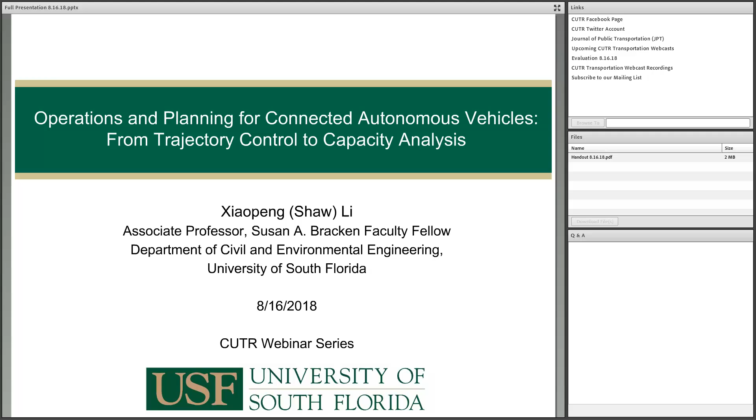So next slide, and if you may, please play the video.

I just want to start with some real-world observations, and this is a stop-go phenomenon that probably everyone experiences in their morning or afternoon commute on freeways. When traffic is slightly congested, vehicles are engaged in repeated acceleration, deceleration, or even stop and go, which is pretty bothering to all of us. Turning this off. The next slide.

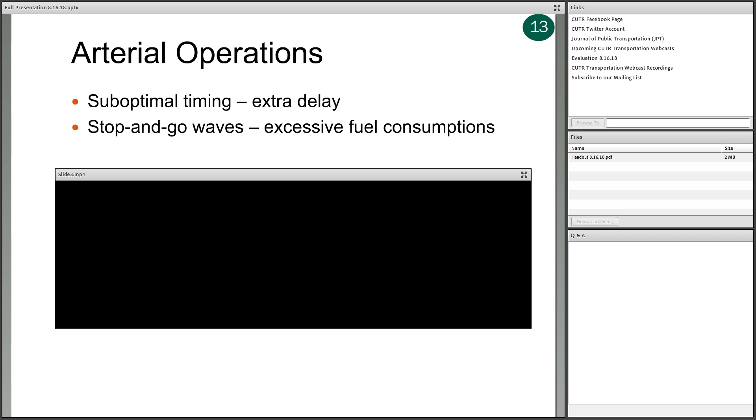Okay. All right. And then you may wonder what happens to arterials with signalized intersections. Let's see whether the video goes. Okay, here.

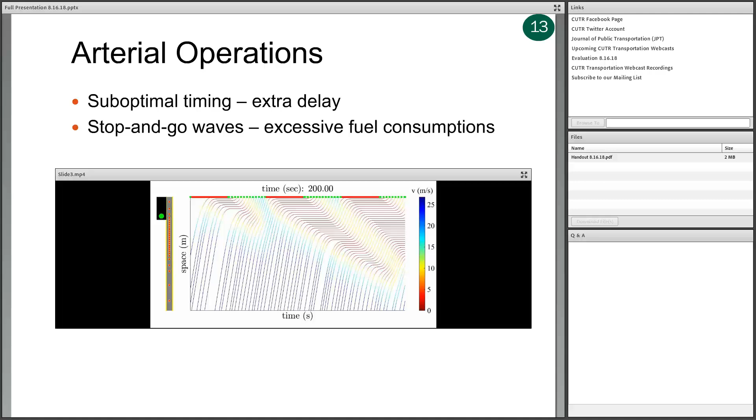So this is a simulation about how vehicles move in front of a traffic signal light. You can see due to the alternating red and green lights along the timeline, vehicles have to stop and go, which forms this kind of stop and go waves in front of the signalized intersection. So this is also an adversary to our driving experience. So next slide.

Whether on freeway or arterial, this kind of annoying phenomena in human-driven traffic, which is what we have now, have lots of adverse impacts, such as congestion. You know that congestion is pretty severe in every major city and costs a lot of money. And next, due to the excessive travel time and increased stop and go movements, fuel consumption and emissions are significantly increased, not only in the U.S. but also across the world. And following this, the safety hazards are much more exacerbated. We know if vehicles are frequently decelerating and accelerating, the safety risks are going to soar.

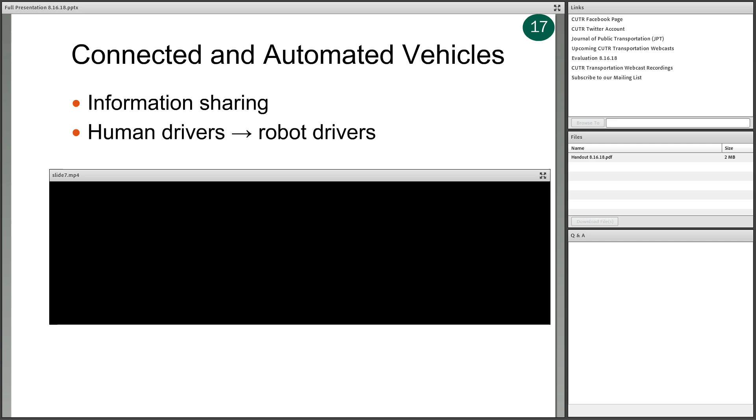So how to address these problems, actually? I mean, there are many ways, and this is probably the central problem that transportation engineers should focus on. And my approach is to think of emerging technologies such as connected and autonomous vehicles. Basically, connected vehicle technology is just information sharing. So vehicles can talk to neighbor vehicles and infrastructure units, so they know each other's information.

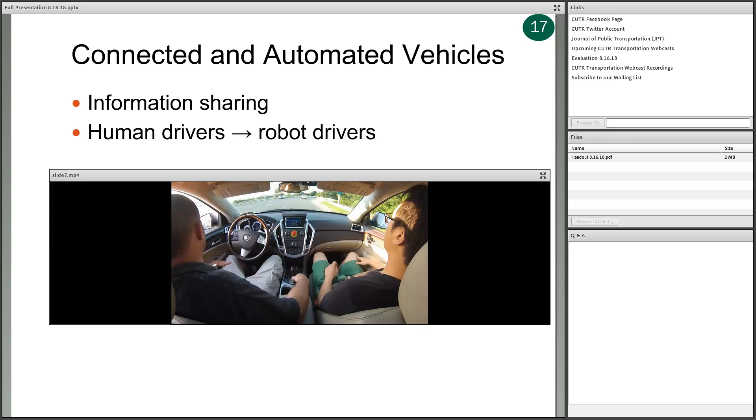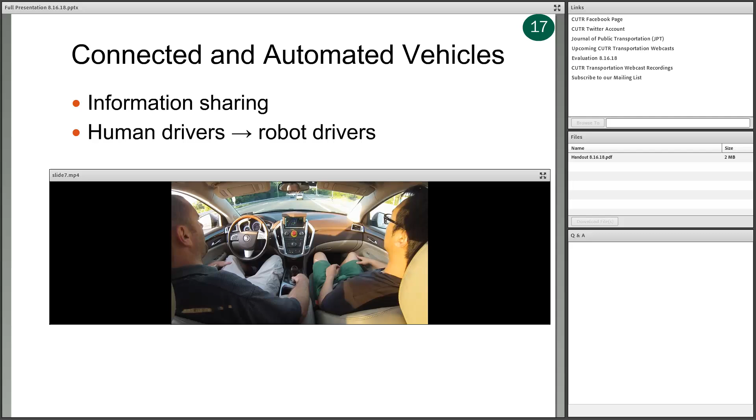That's a connected vehicle. And automated vehicles, or sometimes autonomous vehicles, basically replace human drivers with robot drivers. And just like this video shows, humans can all be turned into passengers, and the computers will take the chauffeur's job. Next slide.

So why do I resort to CAV technologies for the final cure? Because with CAV technology, we can actually control each vehicle's movement exactly and precisely. And then we can coordinate their movements in ways that we could not do with human-driven vehicles. And some fundamentals of highway traffic operations may be revolutionized due to these new technologies.

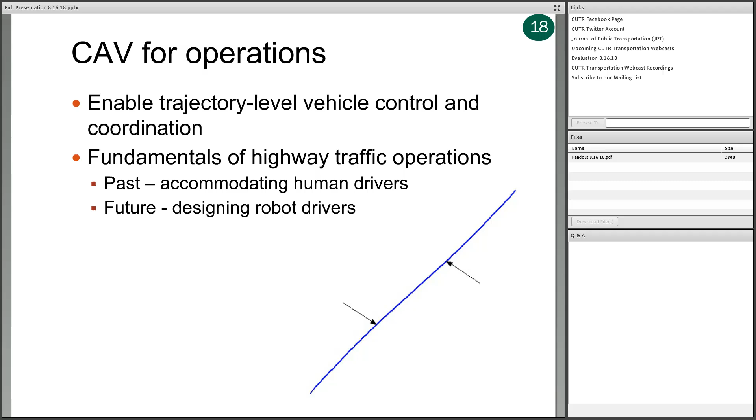In the past, we designed all these management schemes and planned the infrastructure just to accommodate human drivers and their behaviors. But in the future, it's all about designing the protocols and programs of robot drivers. So this nice transition gives us lots of opportunities to address and resolve some of the outstanding transportation issues I mentioned earlier. So let's talk about a couple of points about the implications of this technology for planning and operations.

So actually, how to realize it? I cannot do a poll, but I am pretty curious about your view on how much capacity CAVs can improve. Lots of uncertainties. But this is definitely something we want to work on, and I hope sometime we can achieve like 5,000 or 6,000 vehicles capacity per lane.

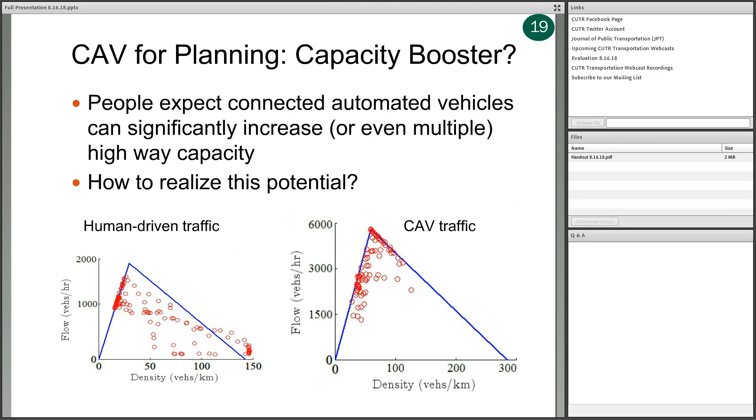And then, so we talked about the operations issues and planning issues about the CAV before. So how do we really use the CAV technologies to realize these nice visions from the engineering point of view? So I take a three-step approach.

First, I really want to look into each individual vehicle's movements and microscopic behavior, and we want to look into how to control each individual vehicle's trajectories in order to improve traffic smoothness and reduce headway. And this microscopic level of benefit will turn into macroscopic capacity improvement, and we want to understand the relationships between CAV traffic characteristics such as CAV penetration ratio and other things, and the macroscopic measures such as traffic throughput that are concerned in transportation planning.

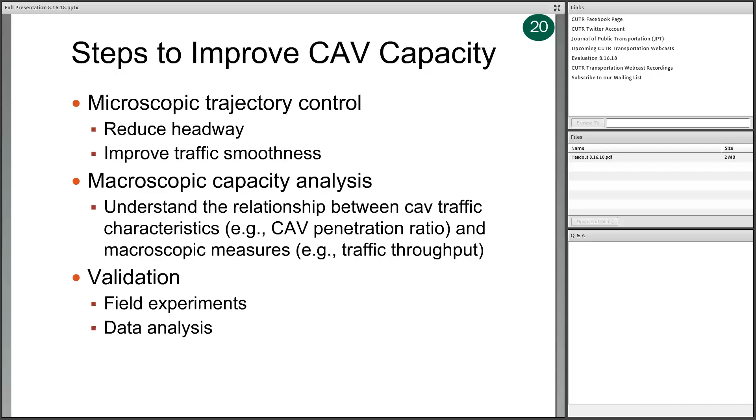And with both of them being investigated, we really want to validate and test some of these hypotheses and conjectures with field experiments and data analysis. So today I'm going to go through some of my research along this line. So let's just look at the CAV-based traffic operations, mainly on the trajectory level control issues.

I think one major benefit of CAVs is actually we can control the vehicle trajectories, design the vehicle trajectories, and break the traditional box of car following behavior or traditional driving behavior, and really design a new regime of vehicle trajectories. So for example, in the signalized intersection example, the left figure shows the traditional human-driven vehicle trajectories over a segment leading to a signal light over time. We show the trajectories, and we've already experienced stop and go waves due to the stops at the signal light.

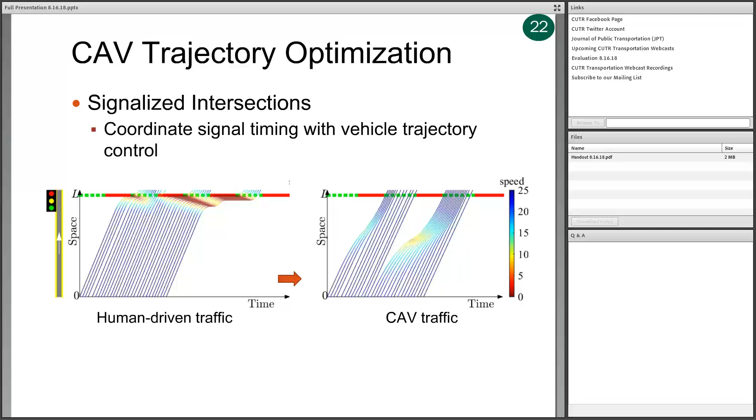But actually with CAV technologies, we may be able to really smooth all these trajectories, let the vehicles gently slow down during the course of running on this segment rather than being stopped right in front of the intersection. This is going to bring lots of benefit, like improving throughput because of reduced lost time and smoother ways of passing the intersection. And of course, these trajectories are smoother, which means that the fuel consumption is less and the safety hazards will be much mitigated.

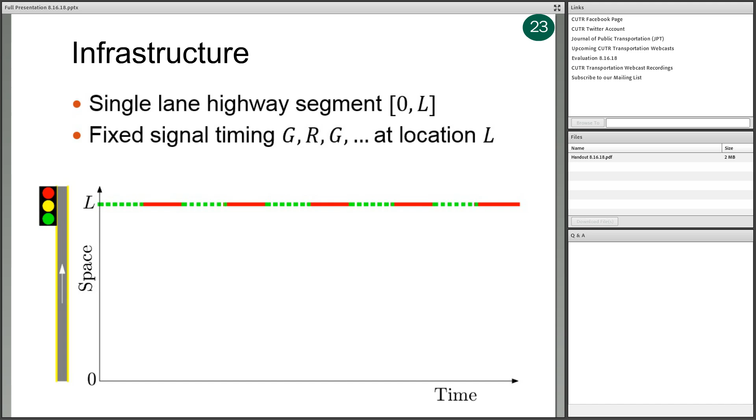Actually, I just want to give you a little bit of flavor about our technical work in this area, just to give you some hints about how we can approach this kind of problem. How do we really implement that kind of smooth trajectory? So basically, we started from a simple problem with a single-lane highway, and we consider fixed signal timing with green time being G, red time being R, and with advanced information technologies, we know when each vehicle arrives at which speed along this segment for some prediction horizon, like a couple of minutes or so.

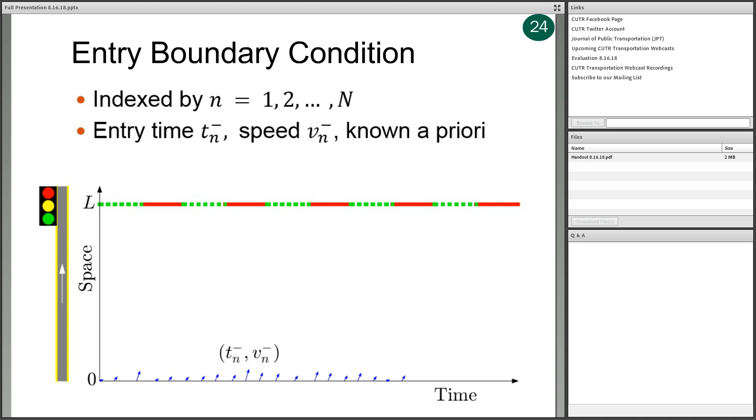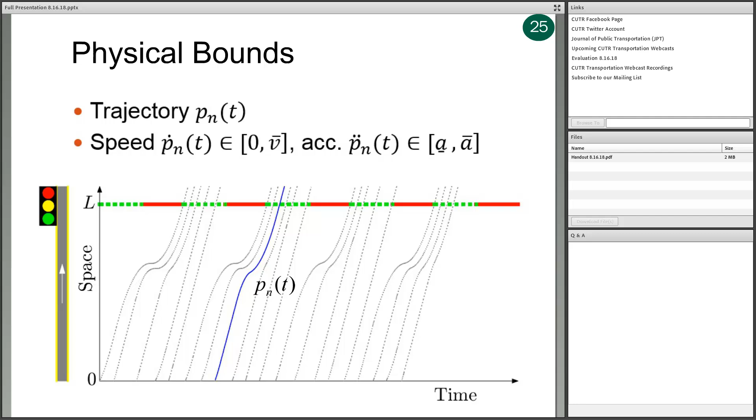And then we know some physical bounds of the trajectories. Let's say there is some speed limit, and accelerations should be limited within a certain range. And we only allow these vehicles to exit this segment at the green time, right? Of course, red time prohibits vehicles from passing.

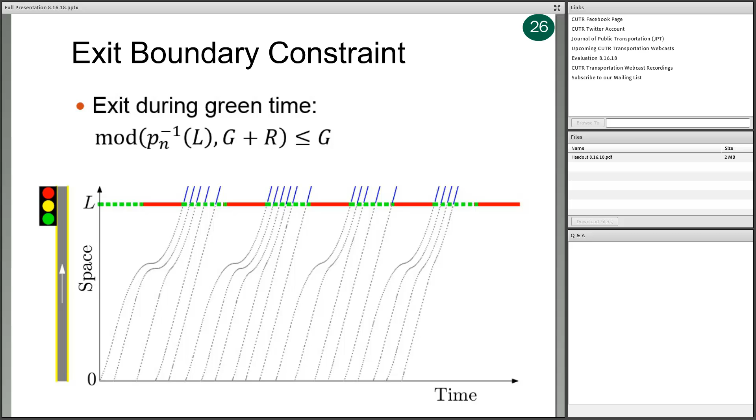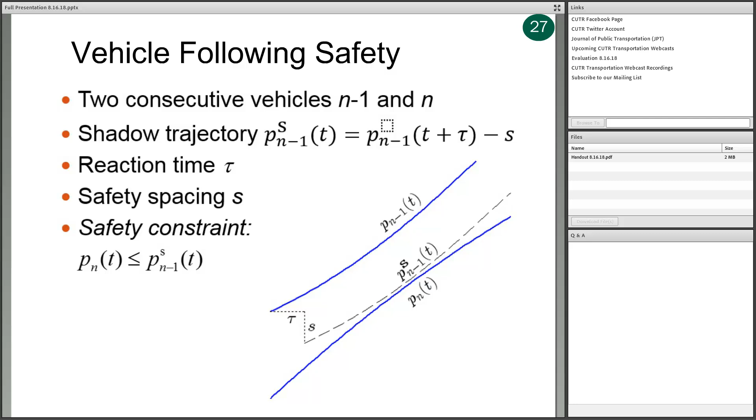And then next, we have to pay attention to the safety between every two consecutive vehicles. So we just say each vehicle is separated from the preceding vehicle by a certain time separation, like reaction time, and a spacing separation, as shown here. That means the vehicle's length plus a safety buffer. So basically, we want to separate all these trajectories within a certain safe and comfortable buffer.

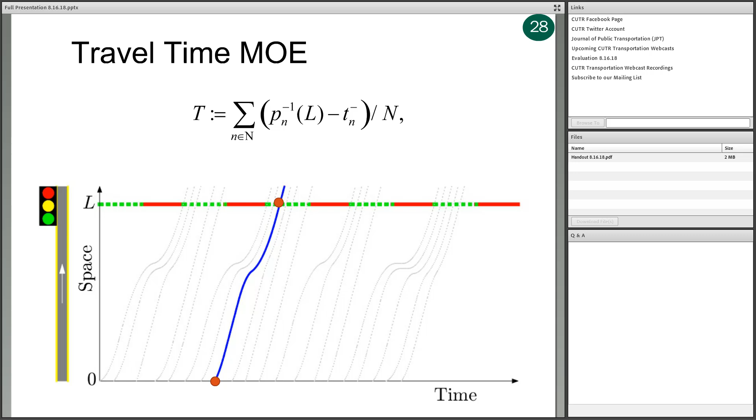With these constraints and settings, what are the objectives for the trajectory control? First, we want to reduce the travel time, right? The travel time for trajectories is very easy to calculate. You look at the difference between these two time points: the time point when this vehicle arrives at this segment, and the time point on the top, departing from this intersection.

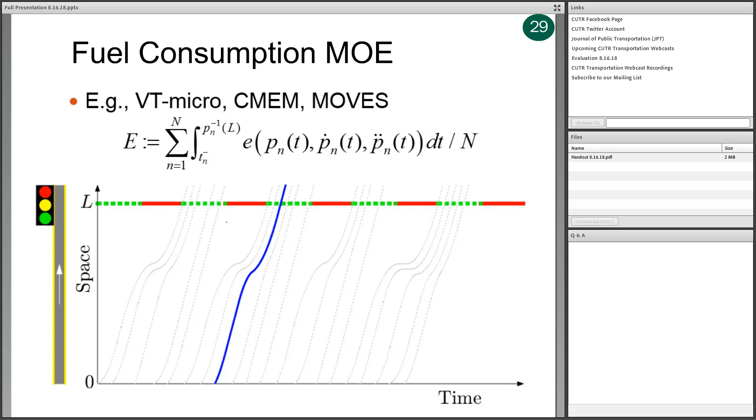And next, we want to minimize the fuel consumption. The fuel consumption can be calculated based on trajectory shape. There are many ways of doing this, but the basic idea is the smoother the trajectories are, the lower the fuel consumption is. And we also can use some surrogate measures to describe the safety, for example, something related to time to collision.

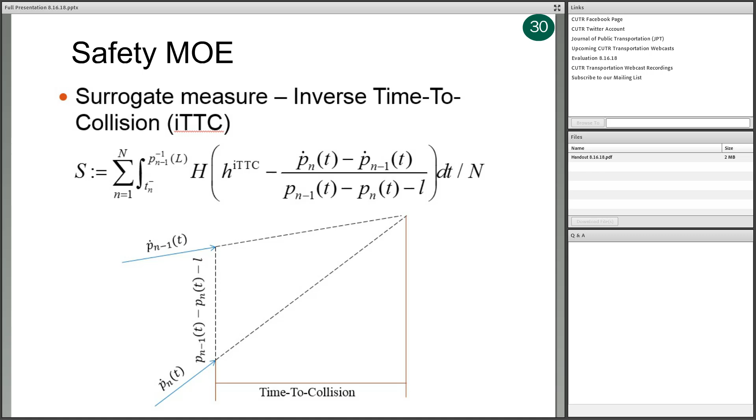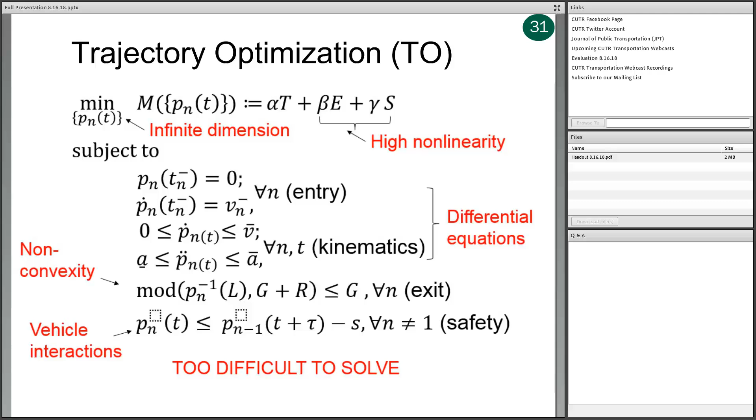So with these objectives and the problem settings, we can basically formulate this problem into a kind of trajectory optimization. Don't worry, I don't intend to go into the depths of the math, but I just want to show the complexity of this problem. Originally, the decision variables have infinite dimensions, and objectives, including travel delay, fuel consumption, and safety, have high nonlinearity, and you have differential equations, non-convexity, and vehicle interactions. So basically, I just want to throw out these terms to let you know this problem is really difficult.

But our contribution is actually to develop a really simple algorithm and approach to solve this problem. So basically, the idea is, if you look at this map, we're going to break the vehicle trajectories into a few analytical segments, and we don't need to control every point of it, but we control some critical points, and that's going to determine the overall shape of those trajectories, and that's going to much simplify this problem.

And with this, we will be able to obtain a solution really fast, and that's going to satisfy the real-time applications, because lots of these trajectory controls have to be implemented in near real time. So we cannot afford to deal with such complex problems. So our innovations are in largely reducing the complexity, and still the resulting trajectories are near optimal, very good quality. It can be solved very fast.

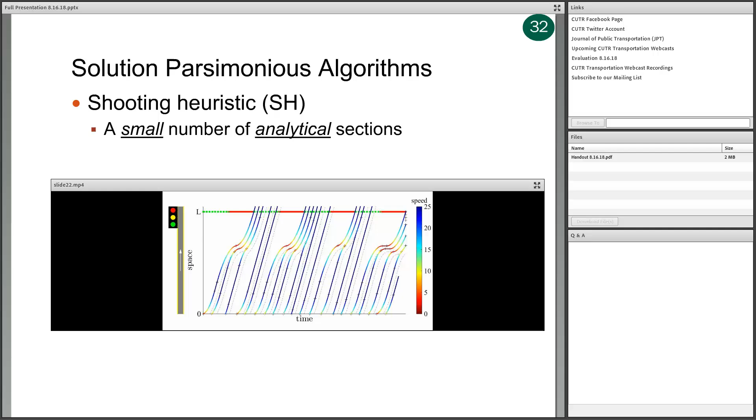Next, the first work just investigated pure CAV operations. That was probably the most ideal scenario where every vehicle is controllable and we don't need to worry about human behavior. But it was necessary to investigate pure CAV traffic because we want to know, at the best, how much we can do, right? At the most optimistic scenario, how much we can do. That's going to be the future benchmark. But we have to pay attention to the transition from pure human-driven vehicles to pure CAVs. That is mixed traffic, right?

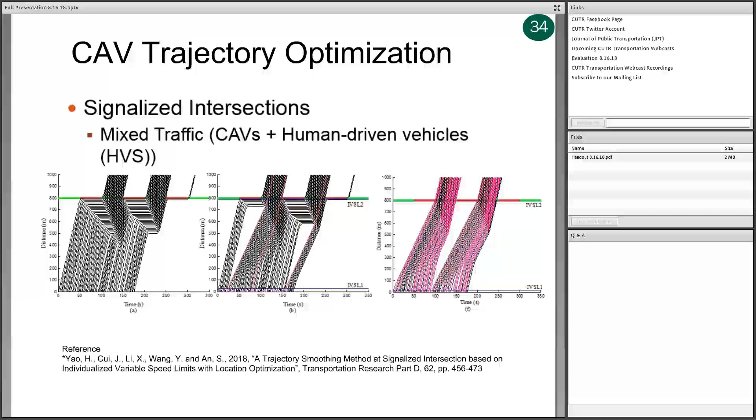And of course, on the right figure, as the penetration rate increases, the benefit will be even higher. But it's exciting to see that we don't need a very high percentage of CAVs to achieve good benefits from smoothing.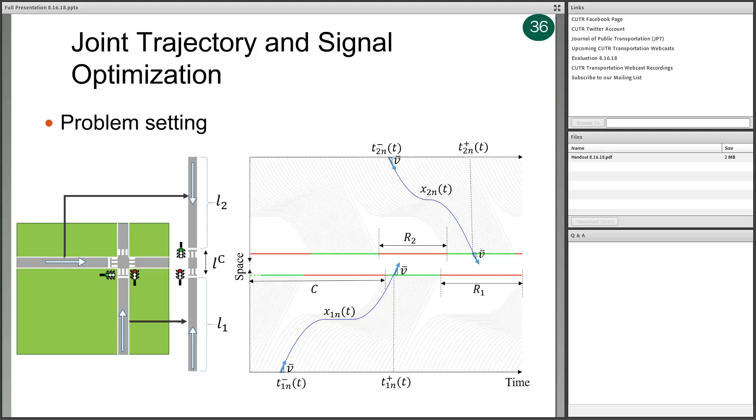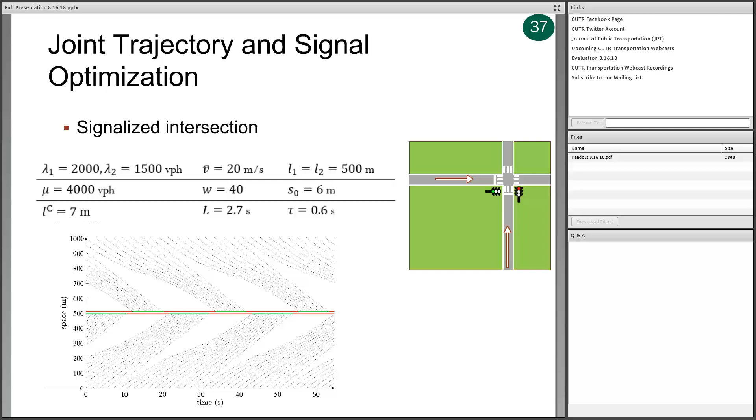We applied this to some numerical studies, and we found that significant improvements can be made at the signalized intersection. We can also adapt this idea to the control of a work zone. Basically the work zone is just like an elongated signalized intersection with a longer clearance time, and we can still use the same principle to do the trajectory optimization.

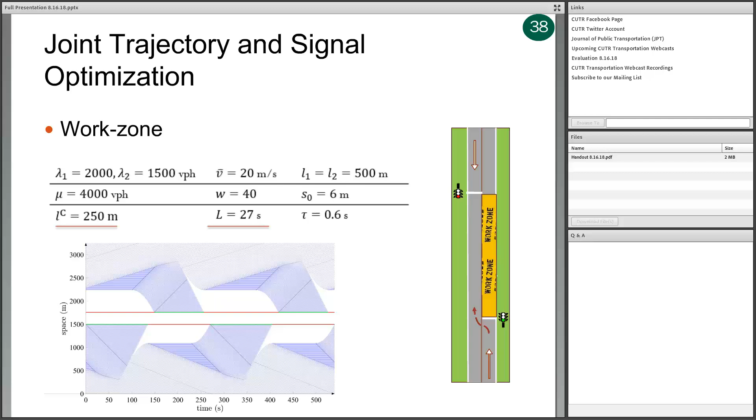And recently, previous studies used some prescribed formulas to design vehicle trajectories, and one place where we can improve is their adaptivity and flexibility to the human-driven vehicles around the CAVs. We are particularly interested in mixed traffic, so we recently did some work using deep neural networks and learning techniques to design vehicle trajectories.

The advantage of this learning technique is that it can take in real-time information very effectively and make the autonomous vehicle control adaptive to real-time traffic states. We don't need to constrain a vehicle trajectory to a certain formula or shape, and the learning will give you the best shape. So this is something in our work. This gives you a brief introduction to my line of research on trajectory control and how to use this concept to improve traffic operations.

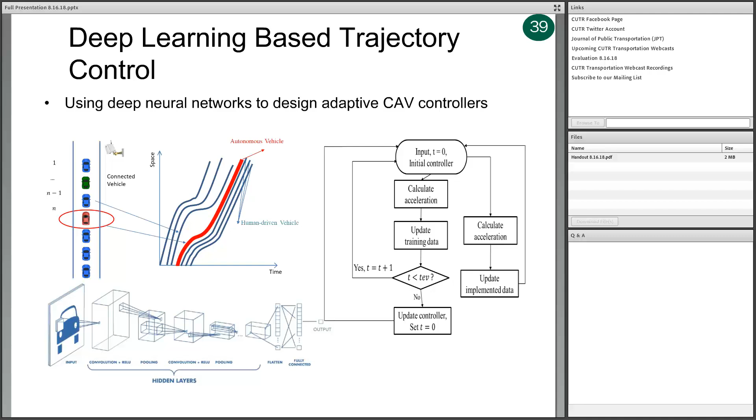Next, I want to go from the microscopic perspective to the macroscopic issues. We've seen a bunch of trajectory optimizations, so what is the implication of trajectory optimization if you look at the problem from a 10,000-foot view? Essentially these trajectory controls determine the headways between CAVs and between a CAV and a human-driven vehicle. So the headway is probably the most important factor that links microscopic trajectory operations and macroscopic capacity analysis.

The most critical issue in capacity analysis is mixed traffic, because that's the problem we want to address in the near future when CAV fleets arrive. So what are the fundamental differences between CAV traffic and human-driven traffic from the perspective of capacity? One outstanding difference is that for CAV traffic, you have to consider heterogeneous headways in the mixed traffic.

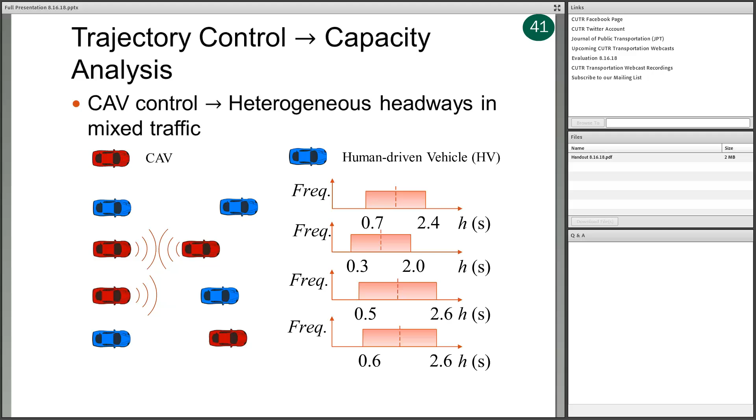Lots of studies just optimistically assume that CAV following CAV has a minimum headway. But I wonder whether this is always the case. Are we a little bit too optimistic? Let's look at what actually happened. This is probably a piece of news you might have seen before: a Google car was pulled over for being too slow and driving too conservatively. That means it was probably keeping too long a headway from the preceding vehicle. And also, if you test ACC vehicles, if you activate adaptive cruise control.

If your vehicle has adaptive cruise control and you're using it on the freeway, you're going to see lots of times your headway from the preceding vehicle is a lot longer than other vehicles' headways. Other vehicles are human-driven vehicles. Actually, if you look at freeway traffic, some human-driven vehicles are pretty aggressive. They can follow the preceding vehicle with less than 1 second headway, right?

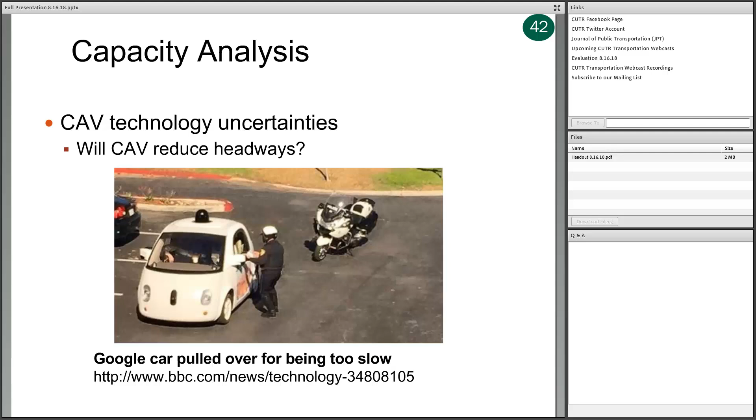So this is not always the case, I guess, that the CAV is always better than HVs in terms of headways. At least in the near future, when these technologies are just put into market, we have to pay attention to this issue. So in some, let's say, pessimistic technology scenarios, we may see CAV pairs may keep even longer headways compared with HV following HV.

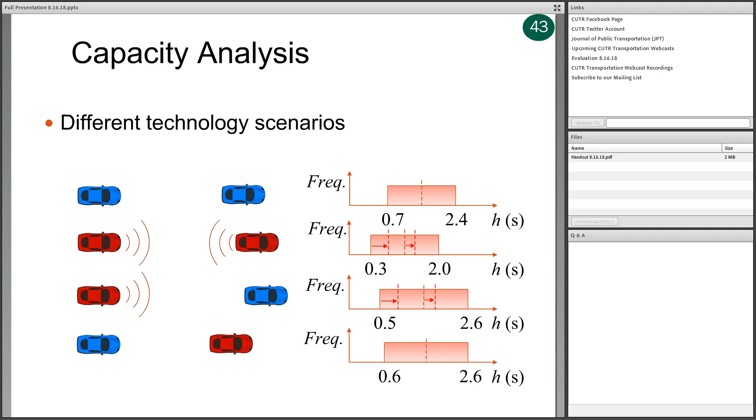So in this study, we have to consider the different technology scenarios and really fully realize the uncertainties of the technologies when we analyze the capacities and talk about planning issues like 10 years or 20 years ahead.

So besides the heterogeneous headways, another important issue is the spatial distributions of these different vehicle types. There are 2 factors that largely determine the spatial distribution of these vehicles. First is the market penetration rate. You all know market penetration rate, right? That's the percentage of CAVs over the total number of vehicles. If the technology is optimistic, of course, higher CAV market penetration rates will improve the traffic capacity,

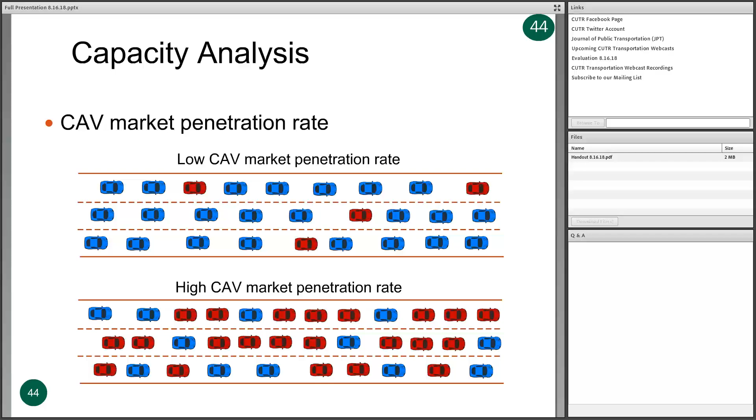like this bottom figure shows. And another factor that is not very well investigated and is also a focus of our study is platooning. I call it platooning intensity. If you look at these 2 figures with the same market penetration rate, I organized the CAVs in longer platoons in the bottom figure. And if CAV platooning indeed can bring in headway savings, the lower figure will give you a higher capacity because CAVs are platooned with other CAVs.

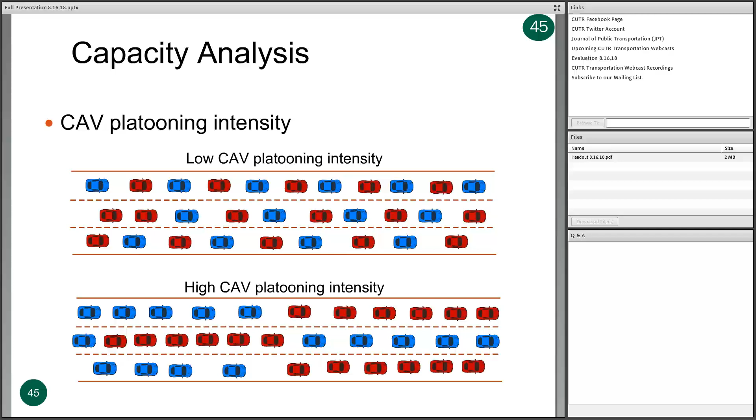You see CAVs are clustered into long platoons, so they form kind of CAV trains. That's going to further improve the capacity if the technology is optimistic. All right, so these two factors we have to consider. And we built a very simple model to capture heterogeneous headways as well as these two features, market penetration rate and platoon intensity, for mixed CAV traffic.

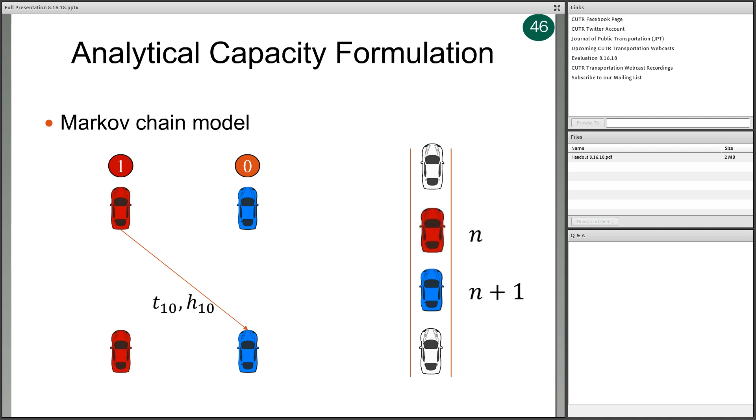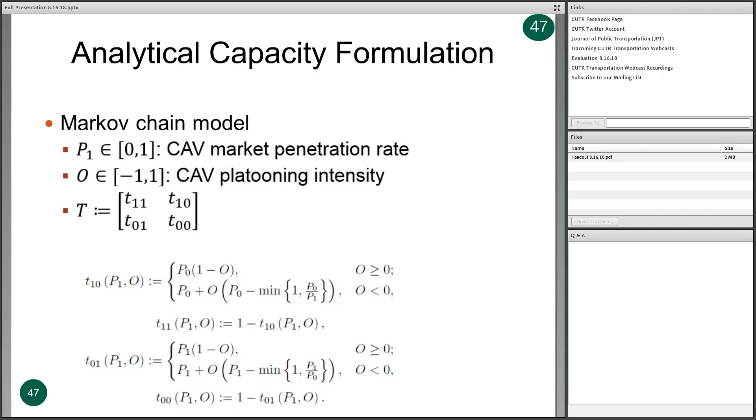Basically we look at the different pairs and assign a different transition probability. I'm going to skip the technical detail. But with this nice model, we used just a very few parameters to quantify these complex problems and all these features we mentioned before. And we come up with an analytical capacity model for CAV mixed traffic, and we want to make it very simple and easy to use in practice.

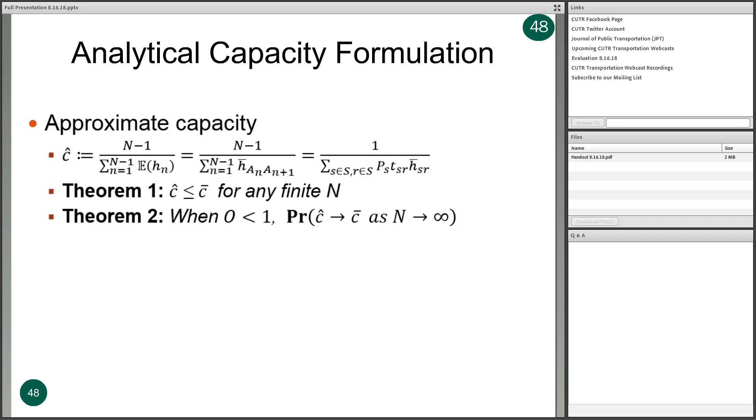So we made some approximation to further reduce its complexity. Of course, we did a bunch of theoretical analysis to show that this approximation is reliable and accurate in real-world applications. And we conducted a number of numerical analyses to show how different features, like penetration ratio, P1 as shown in these two figures, and platooning intensity, O as shown in the legend, impact the mixed traffic capacity.

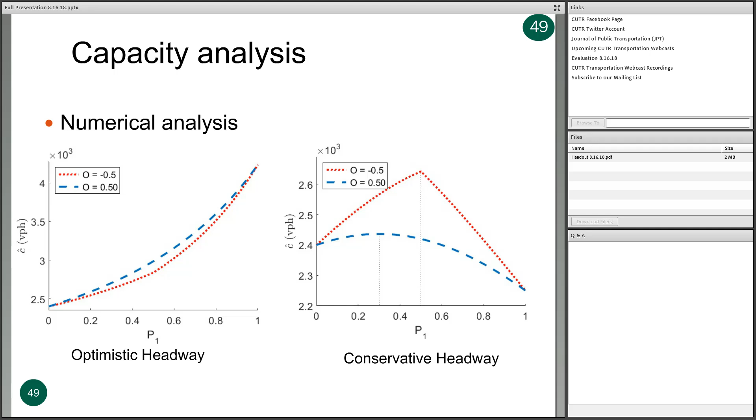And we investigate different technology scenarios: the left is an optimistic headway scenario, the right is a conservative headway scenario. Under the optimistic one, we see both market penetration rate and platooning intensity improve the capacity. The capacity is the vertical axis. But on the right, if the technology is conservative, this might not be the case. There is going to be some pivoting point after which higher market penetration will instead reduce the capacity or throughput.

We can assign some lanes that are exclusive to CAVs, and if they have platooning advantages, maybe it's good to allocate some exclusive lanes to have them fully platooned, which maximizes CAV throughput, right? We propose a model to determine the optimal number of CAV lanes versus the remaining mixed lanes under different traffic characteristics, including the demand rate, the platooning rate, platooning patterns and market penetrations, and so on. And we can solve this problem very easily with existing techniques for integer programming or even enumeration.

And we found that this study yields pretty practical and useful tools to simply determine the optimal number of lanes. We came up with some simple formulas to help engineers determine the optimal number of CAV lanes based on the traffic characteristics. So these things are very important for traffic planning. If you're a transportation system planner, these things are just like input to any kind of your planning models.

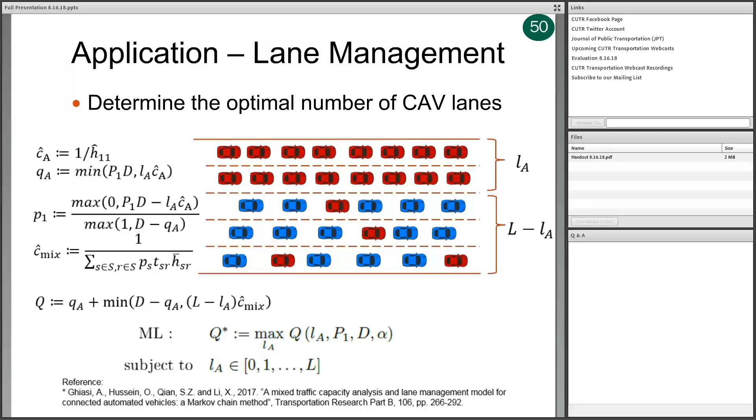These are basically lots of theoretical studies and simulations and things happening on computer, and we know that this level of work is not sufficient to really deliver that full concept and convince the public that this is the way to go. We have to use field experiments to demonstrate some of this work. Although this is probably not the most technically challenging part, I think it's still good to close the loop, to start from the paper, but end up with the field.

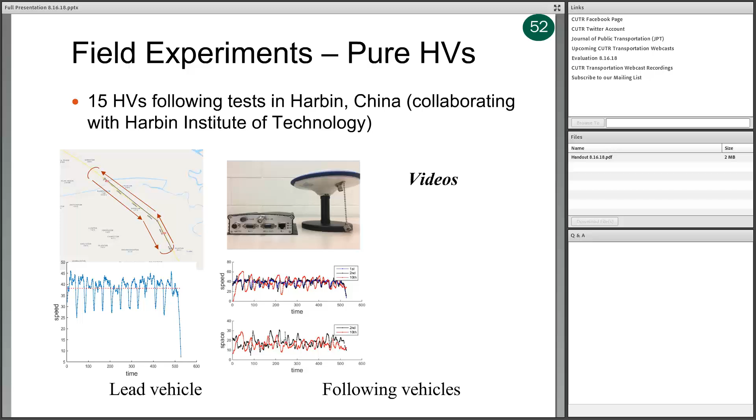So we actually started a number of field experiments. Let's first talk about the pure HV studies. Actually, a couple of years ago, I worked with the partner institute, and if we can play videos here, it'll be great. Stephanie, if we can play the video.

Oh, yeah, great. So basically, we put 15 vehicles to test on the public road. These are all human-driven vehicles. We have furnished them with high-resolution GPS devices, so we can track their trajectories. So with their trajectories, we can analyze their driving behaviors, and that gives the answers to how HV follows HV, their headways, and how they respond to stop-and-go traffic, right?

And another thing I want to mention, let's turn to the next slide. We actually just put through a patent on a video recognition tool we developed to extract vehicle trajectories from drone videos. Right now, drone technologies are becoming more and more popular, and it's pretty cheap to fly a drone to capture vehicle images at a good angle. We can use video processing to extract the vehicle locations, and we developed some sophisticated algorithms to automatically identify the lane and extract the trajectory and all the performance measures, such as headway, speed, flow rate, throughput, and acceleration. Once you have trajectories and lane numbers, you pretty much have everything.

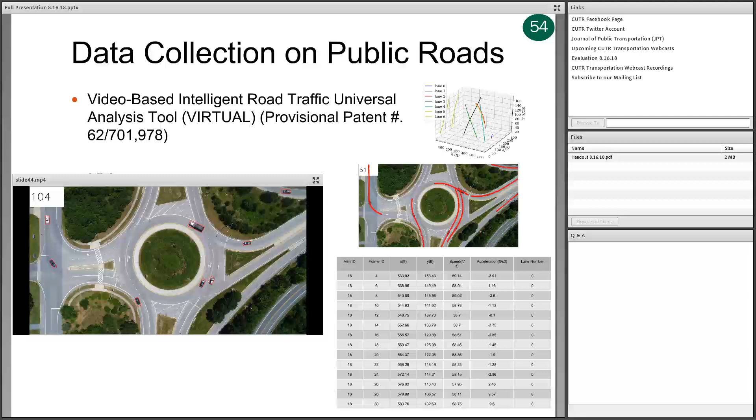So we just put through a provisional patent on this development, and we're using it in a couple of proposals to analyze human-driven vehicle trajectories. And here's another example, next slide, of the use of this tool on a roundabout analysis. Not only for freeways, we can look at complex intersections, extract the vehicle trajectories, and using our smart lane matching algorithms, put them into different lanes. If you look at the right figures, we can come up with these space-time trajectories, and we can archive the video into a structured flat file with very high resolution. So these kinds of tools are very important for extracting trajectory data to understand what's going on with human-driven traffic.

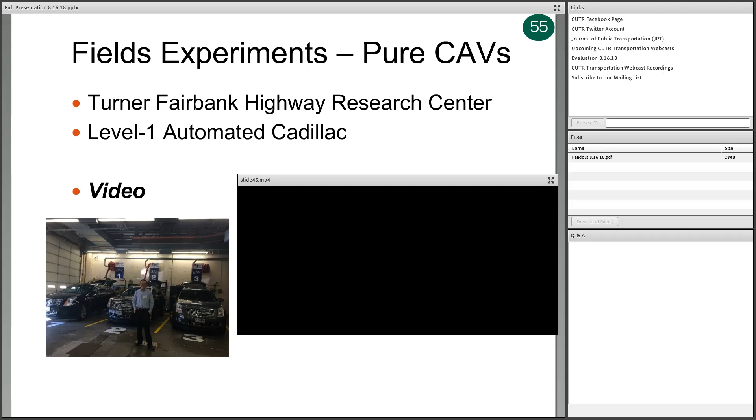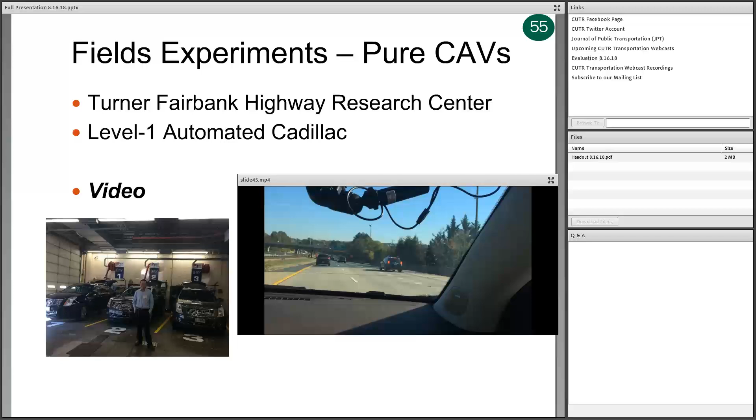Next, I presented the speed harmonization in one slide. You may still have some impression. Actually, that was not just in theory. It was a funded study from Turner-Fairbank Highway Research Center, and they have 3 level 1 Cadillacs, and we implemented part of the algorithm with their Cadillacs and put together some tests on the speed harmonization with their automated vehicles. Down to 25. Next,

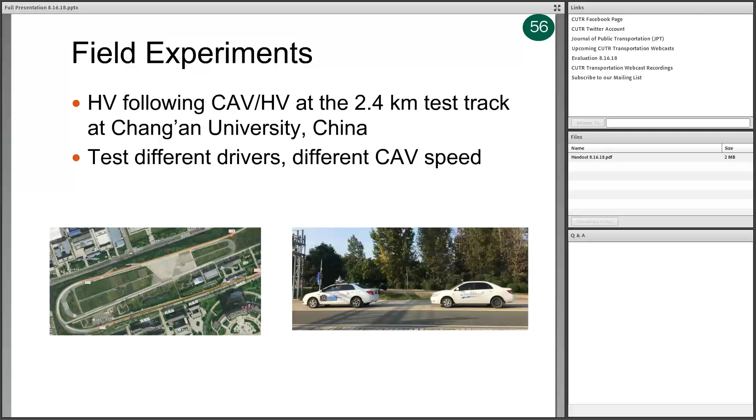the previous studies mainly focus on either pure HVs or pure CAV controls. We also recently initiated some collaborations with an institute that has a state-of-the-art 2.4 kilometer test track, up-to-date connected vehicle communication infrastructure, and a fleet of CAV vehicles. And currently, we started some experiments on mixed vehicles. In this experiment we have just finished, we actually asked the HV to follow a CAV.

This doesn't work. We may need to share the screen. Let's see. I'm going to share the screen.

Yeah, if you can see. So basically, for the studies, we want to investigate the interaction between a CAV and HV. So the important question is how a human-driven vehicle, or HV, follows a CAV.

So in this experiment, if you can see my screen now, the first vehicle here is a CAV, which is equipped with state-of-the-art LiDAR and all kinds of algorithms. This is level 2, and it's not only longitudinal but also lateral. And the following vehicle is actually an HV driven by a human driver. So the preceding vehicle, the first vehicle, can be switched.

Let's play the video, and you're going to see the preceding vehicle. There is even no driver. So I think this is just to show the advantage of this vehicle. But actually, in the real experiment, we put the driver there.

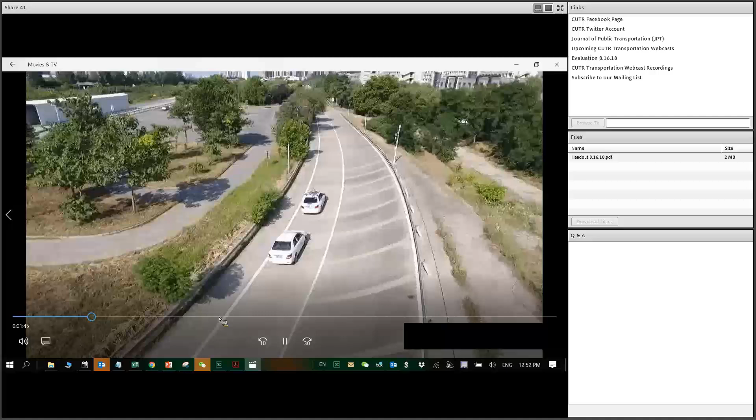So the first vehicle can be switched between HV or AV, and we're going to see how the following vehicle's driving behavior changes when the first vehicle switches from CAV to HV. And you can basically see these two vehicles are just following each other on the straight road, or on this test track.

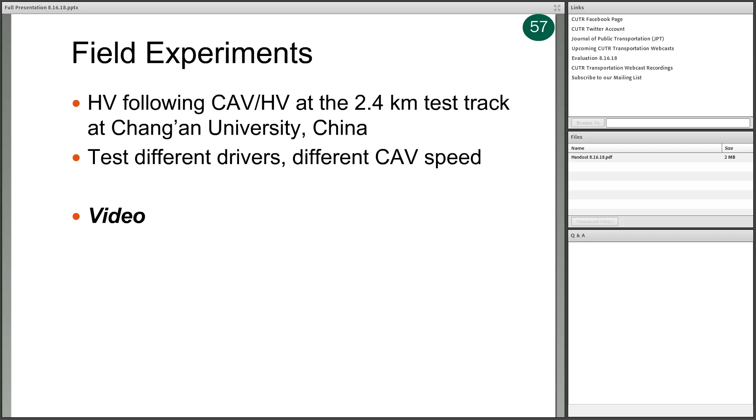following HVs. But some other drivers seem like they are tech-pro, and they want to follow the CAVs closer because they trust technology, or they feel like following a CAV probably feels more comfortable because a CAV drives more stably, right?

So these are actually the things we have done, and we are still continuing lots of these experiments. We want to really implement most of our proposed studies and algorithms that we introduced before in this presentation in this test field. We're currently conducting some experiments on lane changes, and next we're going to conduct some experiments coordinating traffic signals with the CAV trajectories in a mixed traffic flow. So with this, I conclude today's presentation.